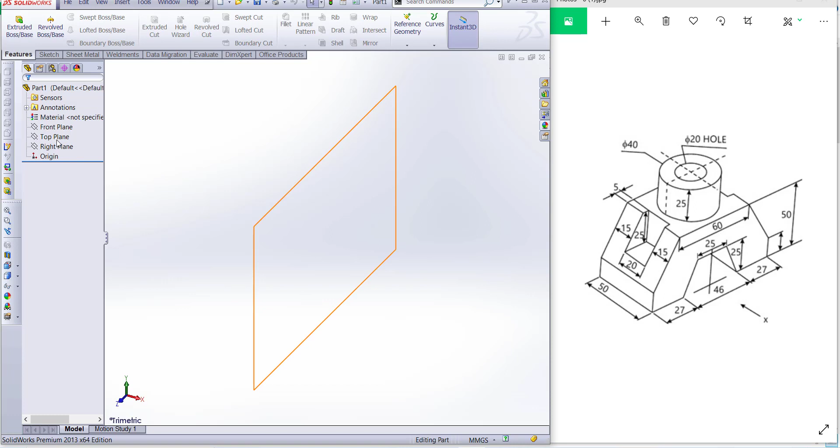So firstly, take a plane and normal to. First we draw this portion, and after that this cut, and after that this portion. Okay, so make a sketch. Go to sketch and draw a sketch. Okay, simply draw a sketch. Let's redraw on this portion, this point.

Okay, now dimension. This is 27, and this one is 46, and this one also 27. Okay,

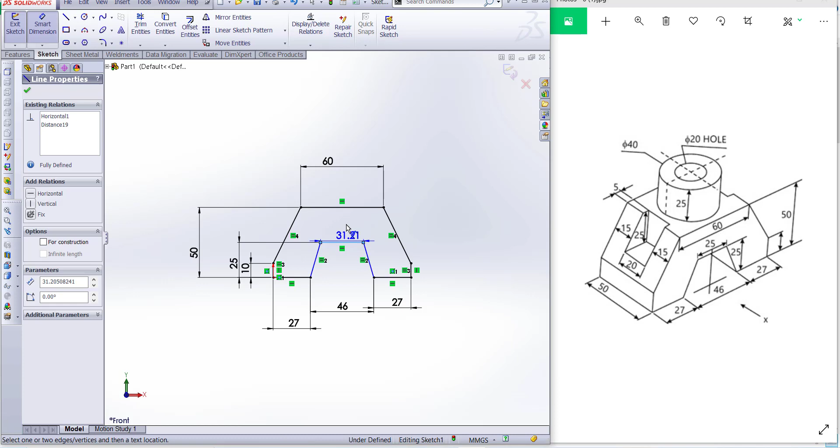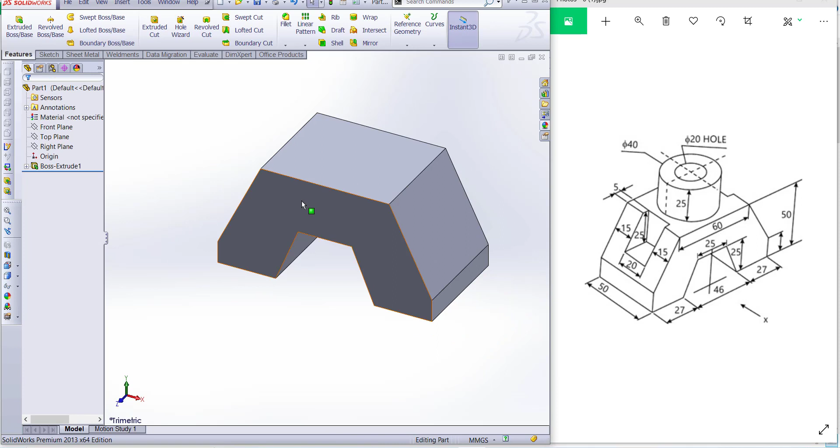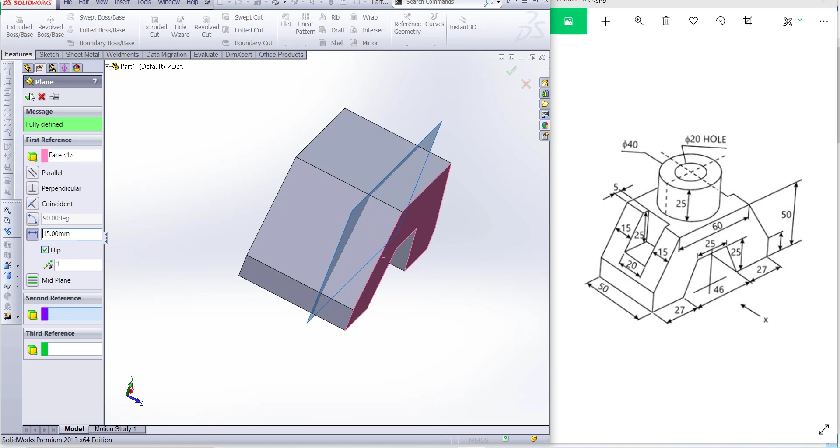Now we have to make cut on it. So click on this face and take a plane. Flip direction, and distance is 15 millimeter. Click OK. Go to plane, normal to, and sketch. Now make a sketch. We draw a sketch.

Okay. First, this is 5 millimeter, and the height is 25. Okay. Now go to finish sketch, or we take mirror on this side, or just cut extrude first and then mirror. Okay, so let's cut extrude first. Sorry, cut extrude.

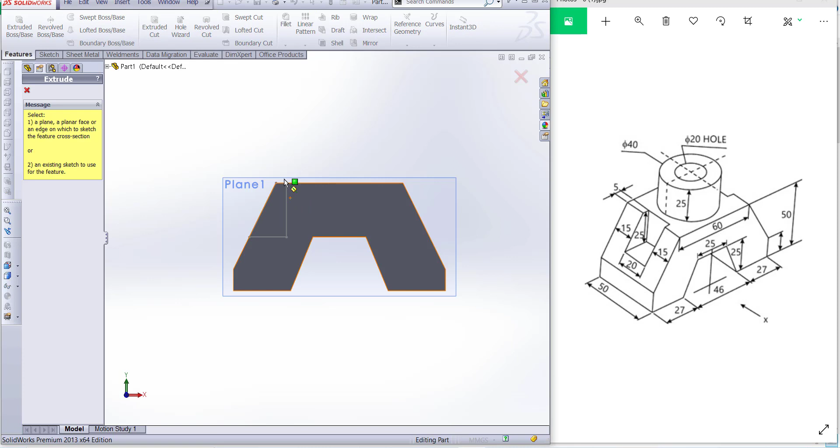Flip direction. This is 20 millimeter, and okay. Okay, so this is our cut. Now we have to mirror. Take a plane, a reference plane. Total is 27, 54 and 46, 100. So take 50 millimeter and okay.

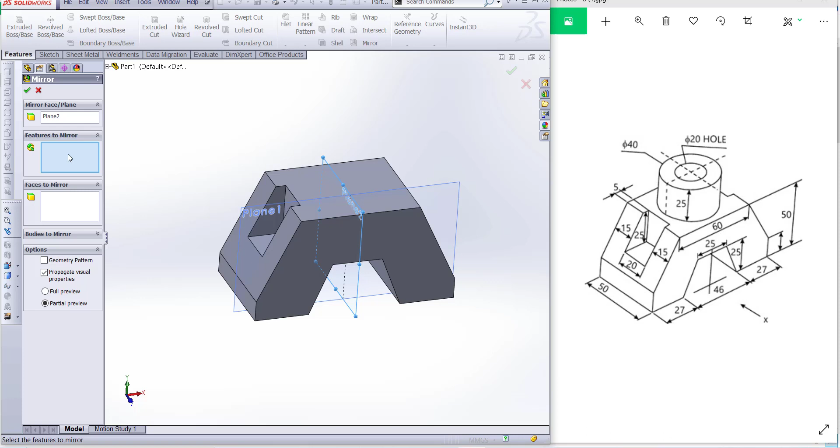Now go to mirror and features to mirror, cut extrude and okay. So we mirror this side also. Now hide the plane, this one also hide. Okay, now we have to draw this portion.

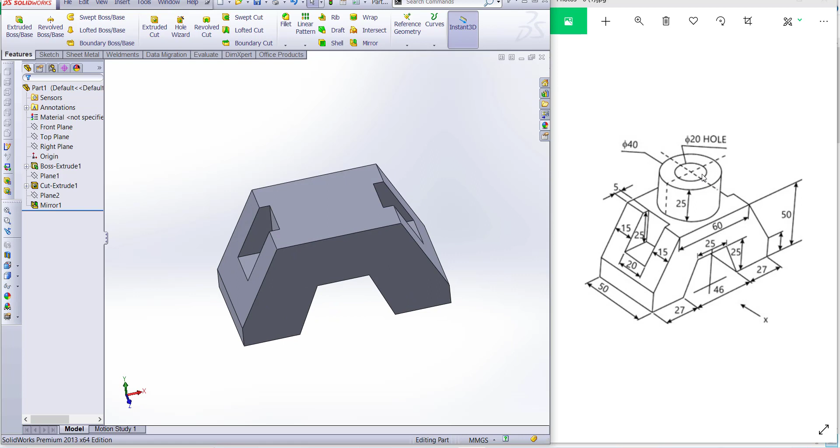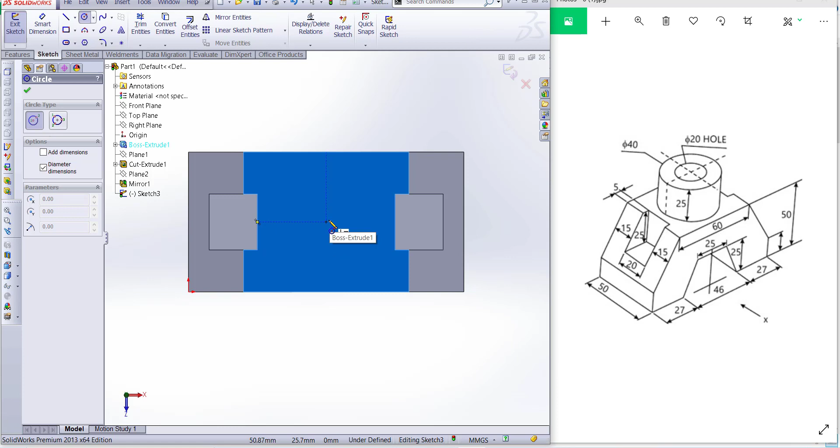Go to this face and normal to, and take extrude first and draw a circle on the center. Okay, first one, second. Dimension. The outer circle is 40 and inner circle is 20. Okay, and the distance there is 50.

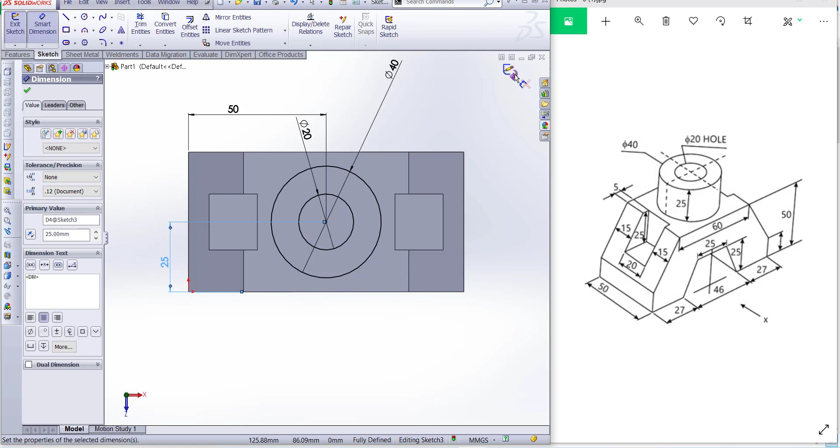Okay, and this distance is 25. Okay, now finish the sketch and we have to extrude 25 millimeter. Result and okay.

So you can see our exercise is complete.